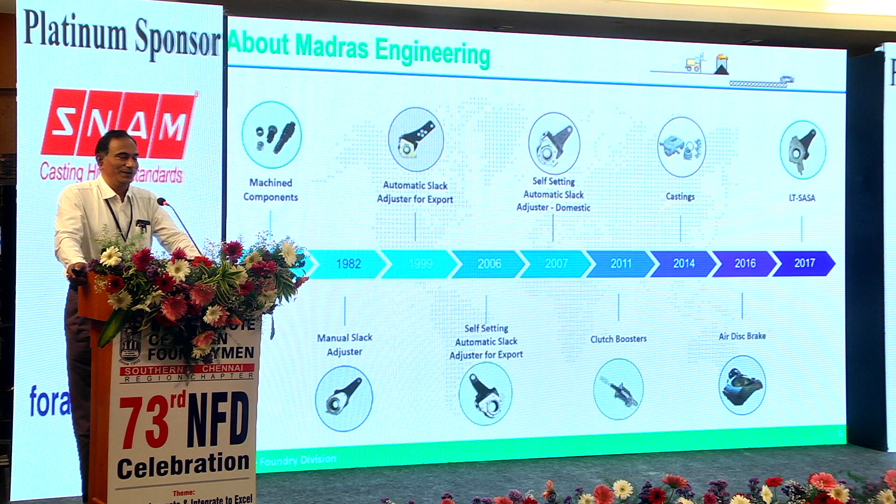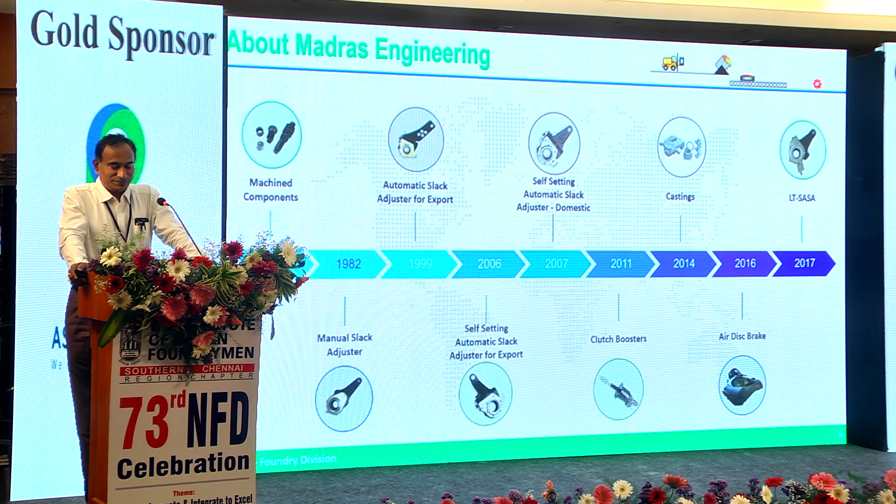About Madras Engineering, we started in the year 1966 with a machining component division. Today we are the world's second largest slack adjuster manufacturer. We always say drive safe, trust the leader. We are the leaders in the business. We are the largest slack adjuster manufacturer in the country, second in the world.

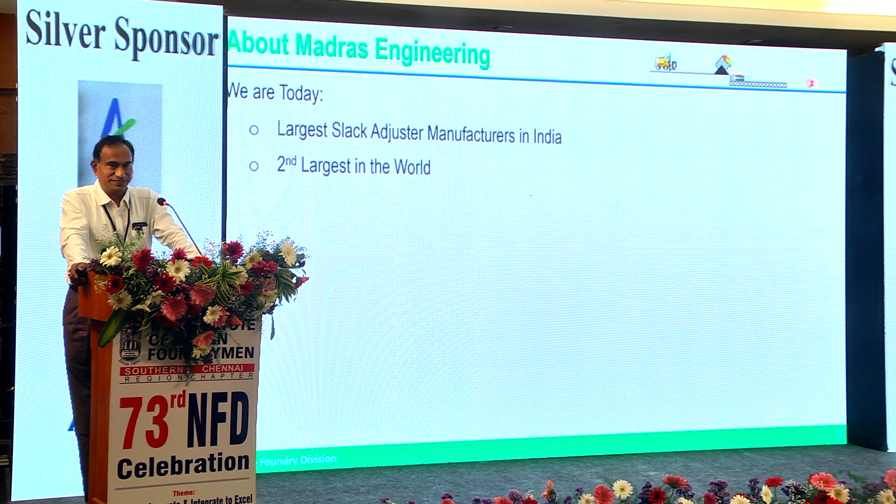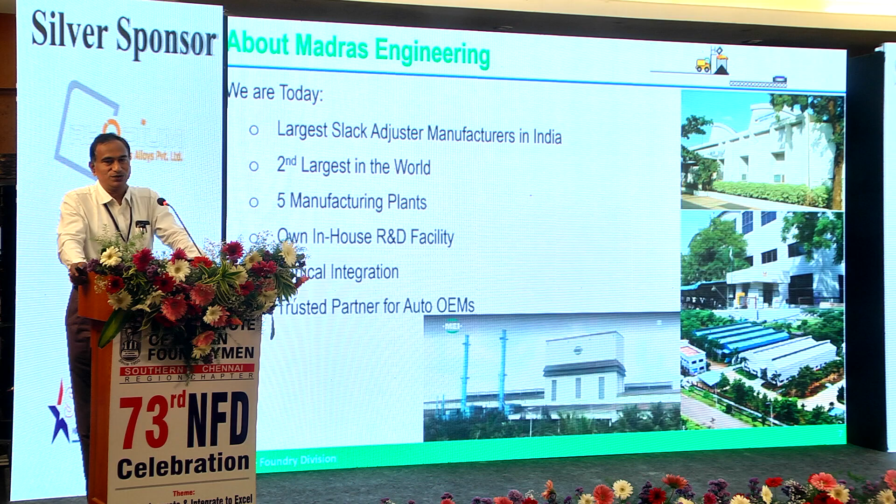We have 5 manufacturing plants, all in and around Chennai. These are our manufacturing plants. And we have our own in-house R&D unit. And we are vertically integrated with the foundry division. And we are the trusted partner for auto OEMs in India and abroad. Global footprint, you can see from here our parts fly all over the world.

Coming to the foundry division, we established commercial production during the year 2013 with an installed capacity of 12,000 metric tons per annum. We added a second molding line to enhance the production capacity to 24,000 tons per annum during 2018. We are now operating at full capacity. Apart from producing in-house, we also buy about 3,600 metric tons per annum from outside foundries.

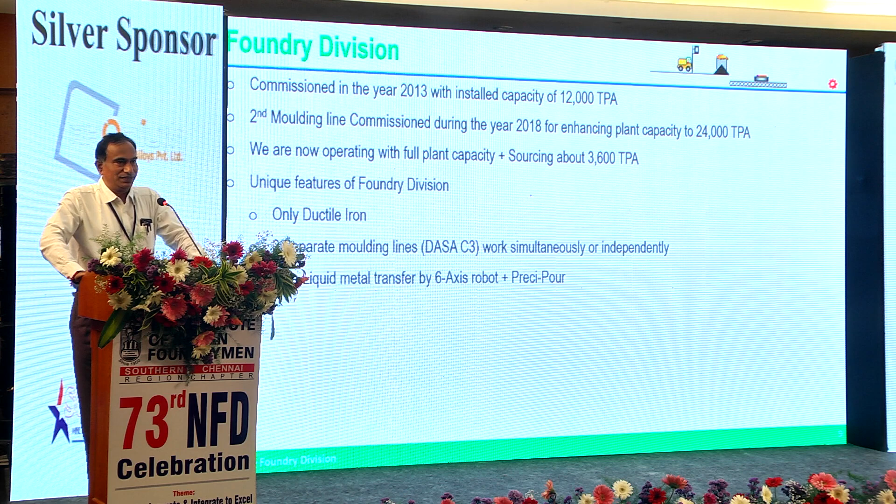We have unique features in our foundry division, like we produce only ductile iron. And we have 2 separate lines, both are C3 lines. They work independently and also simultaneously. That is a unique system we have in our foundry. We have safe liquid metal handling. We have a 6-axis robot that carries metal directly from the furnace till pouring into the tundish. Even the magnesium treatment is done by the robot.

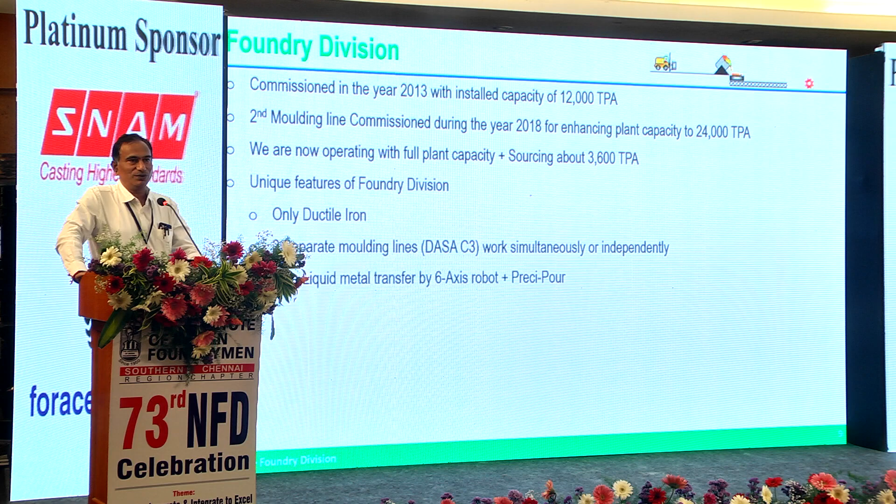And we have Preci-Pour for pouring molds. We have hydraulic trimming to eliminate manual fettling. We have single piece flow. So melt to ship is about 6 hours. That is why our inventory turns are close to 50 times a year. So we produce 1 million parts from 423 various products.

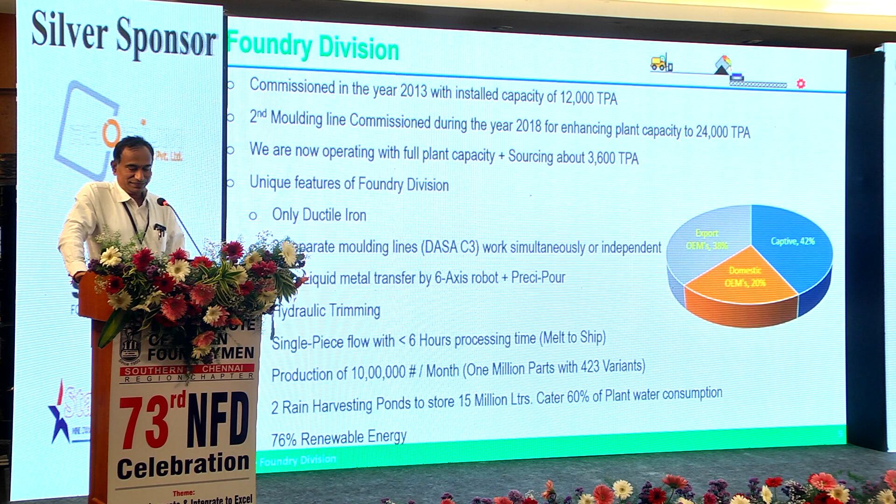And 2 rain harvesting ponds to store 15 million liters of water, which caters to 60% of our plant water consumption. 76% of the power we use is from renewable energy. So this is a brief introduction of the foundry division. Out of the plant capacity, 42% goes for captive consumption, 38% to export OEMs, and 20% is for domestic OEMs.

The objectives of this presentation: as I explained, we are here to share the knowledge, not to teach foundry people. We are all experts assembled here. Whatever we learned over the years, the best practices we practiced in our foundry, we wanted to share with the foundry fraternity. As a foundry fraternity, as a foundry team, we get benefited together.

So we wanted to support the Indian foundry industry to become world class, by design to manufacture, productivity improvement, quality improvement, cost competitiveness, use of technology for efficiency improvement, improved on-time deliveries, customer satisfaction, enhanced collaboration with customers, and product redesign for mutual benefits. So these are the objectives of my presentation today.

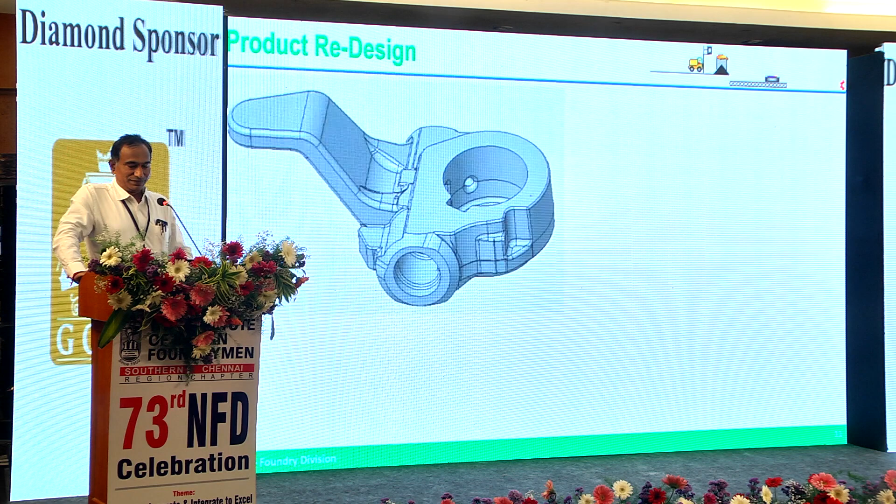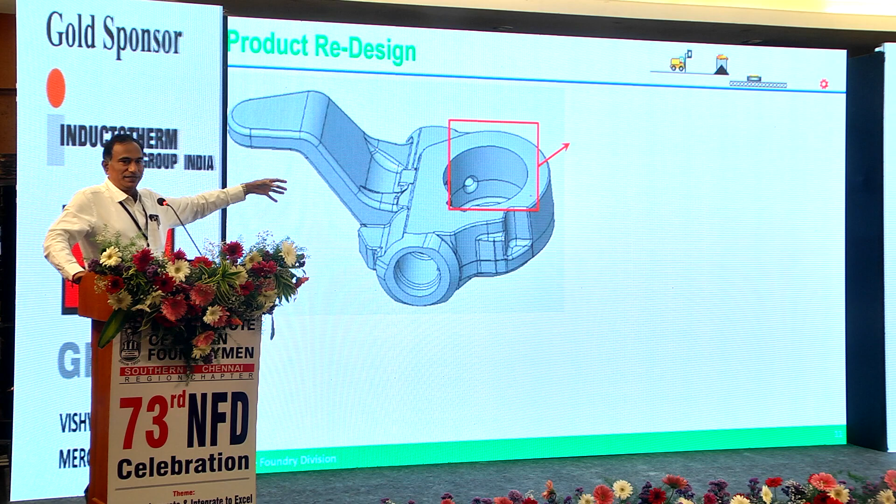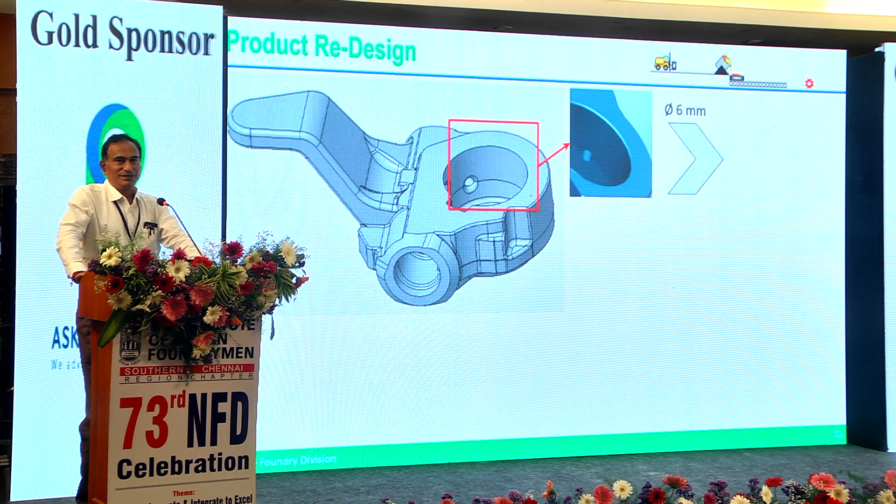So let us go to the main content, the product redesign. We have a couple of examples of how we redesigned the product for mutual benefit with the customers. The hole, called the grease hole, is for pumping grease into the gear assembly inside. If you see the close-up, the hole looks like this. The diameter of the hole is 6 millimeters, and about 10% of the time we used to have hole blockage.

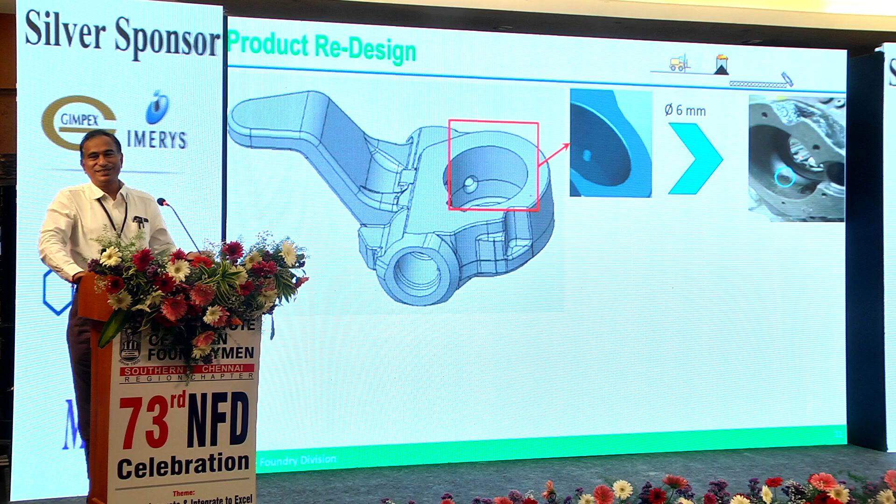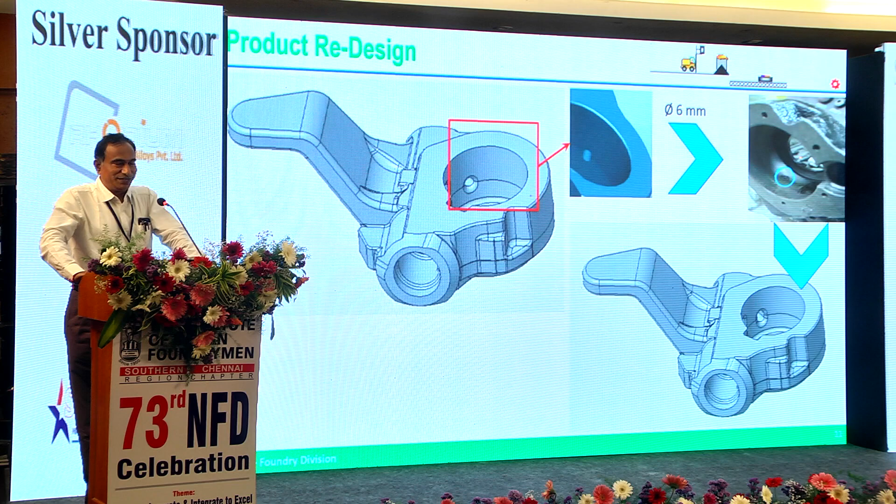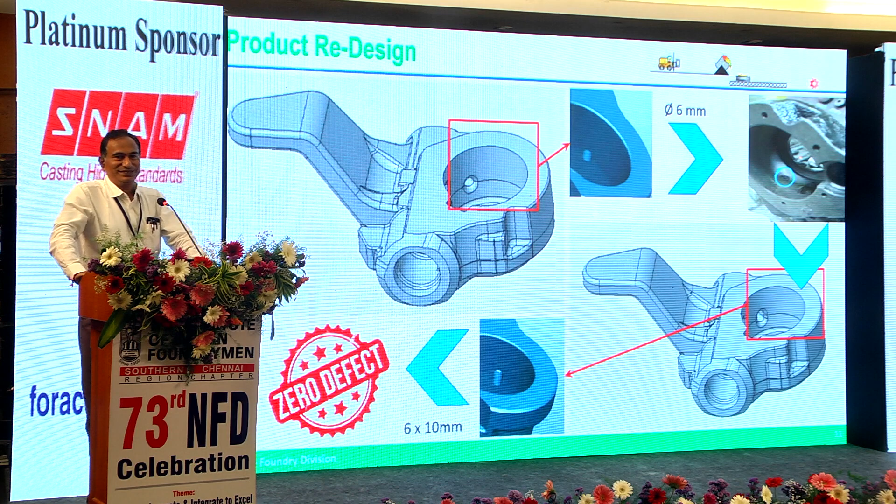The hole is formed by the core, and because it is only 6 millimeters in diameter and about 6 millimeters long, it always tends to fuse. 10% of the time we either had to reject or spend a lot of manpower to remove the core blockages. To overcome this, we redesigned the hole, without compromising fit, form and function, to a size of 6 by 10 millimeters. After implementing this, the defect is 0. Not a single instance of core blockage in the casting since.

Interesting. So this technique used is called why-why analysis. Always we have to question ourselves. We should not question others. We have to question ourselves. Why blockage? Why? If you question ourselves 5 times, the 6th time you will get the answer.

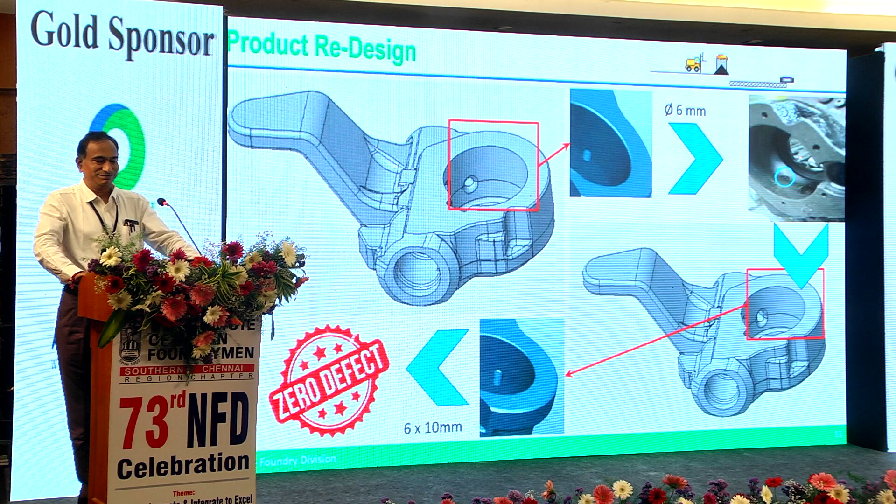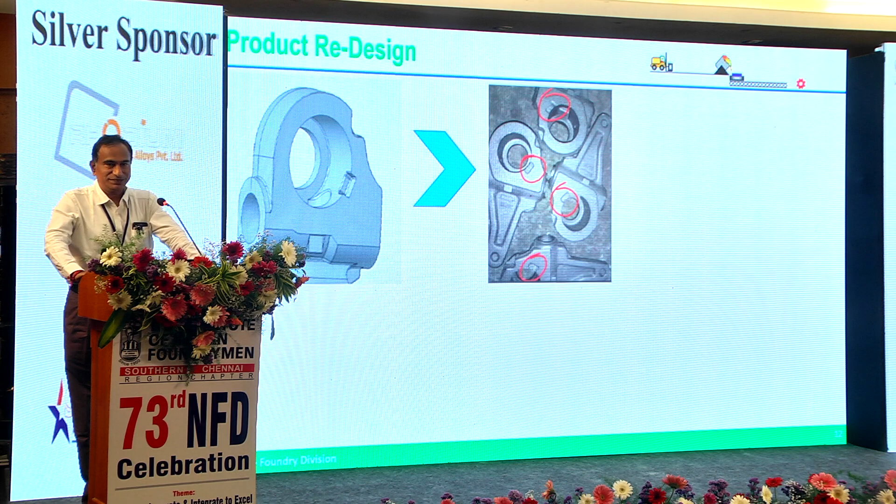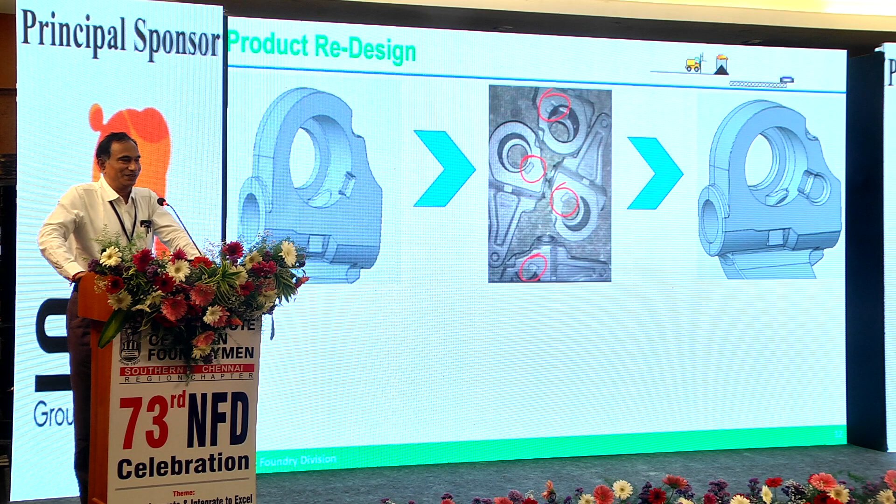Then again we applied why-why analysis. Then we thought, let us enhance the slot size so that the mold never breaks. And there is a reason for enhancing the slot size. Whatever we enhance gets scooped off in the machining. So finally there is no impact on the machined casting. Whereby we are able to eliminate the mold breakage to 0. After implementing this, there is no evidence of mold breakage in the Sasa body castings. So this is also again the technique called why-why analysis.

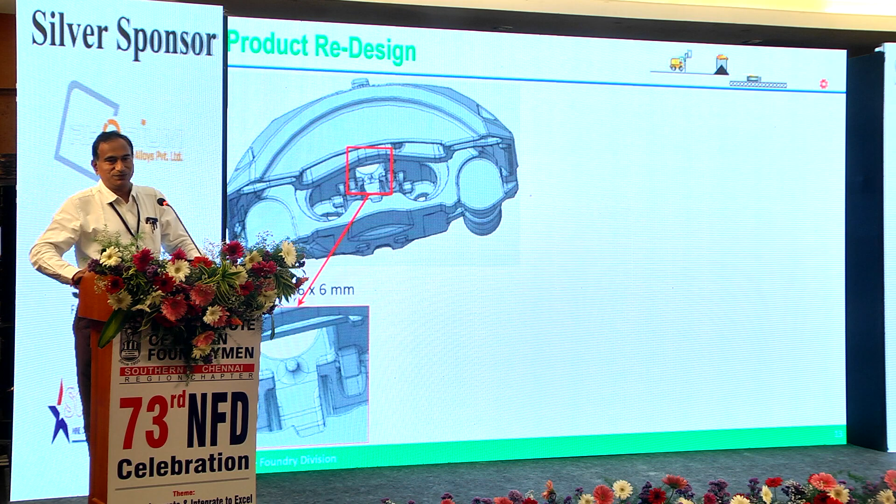Then the third one is also on the product redesign. This is an ADB, air disc brake housing. We have a sensor pad lock which is about 6 millimeter in diameter and 6 millimeter length. It is a very small projection in a large body of 20 kilograms weight, and this is formed by the core. So when the core is painted, the small slot gets filled up with the core paint. So one day suddenly about 200 bodies got rejected because the core paint got settled in this, and the people in the molding did not notice.

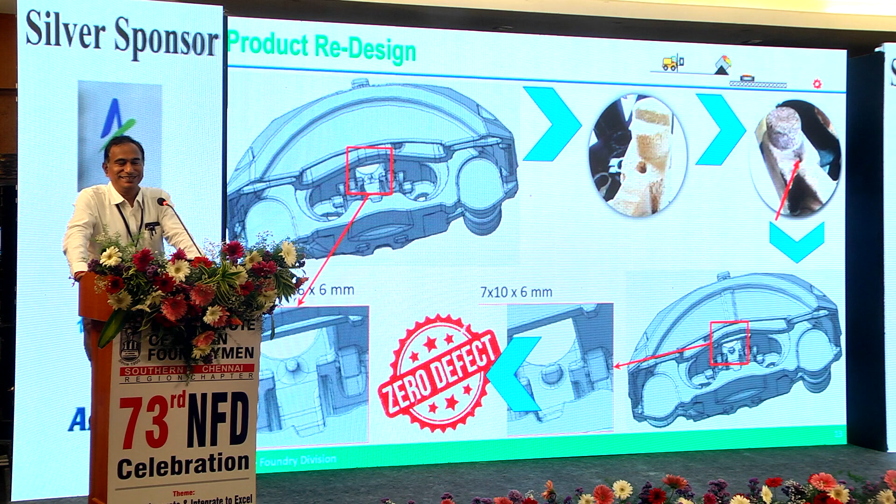So that triggered us to think again why. So we found a solution for this as well. We worked with the R&D and got the product redesigned to the size of 7 by 10 millimeter, keeping the height 6 millimeter, which led to 0 defect. After modifying the design, not even a single instance we had a mold breakage or a profile issue in the casting. So again we achieved 0 defect by applying why-why analysis.

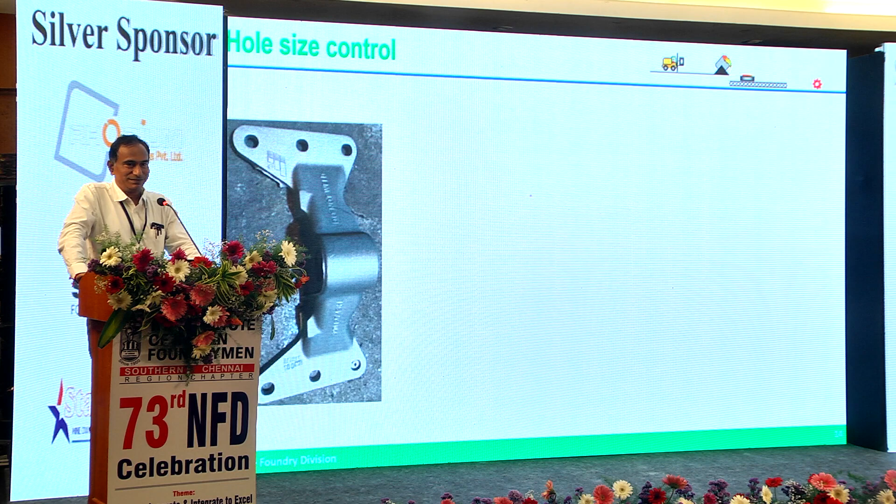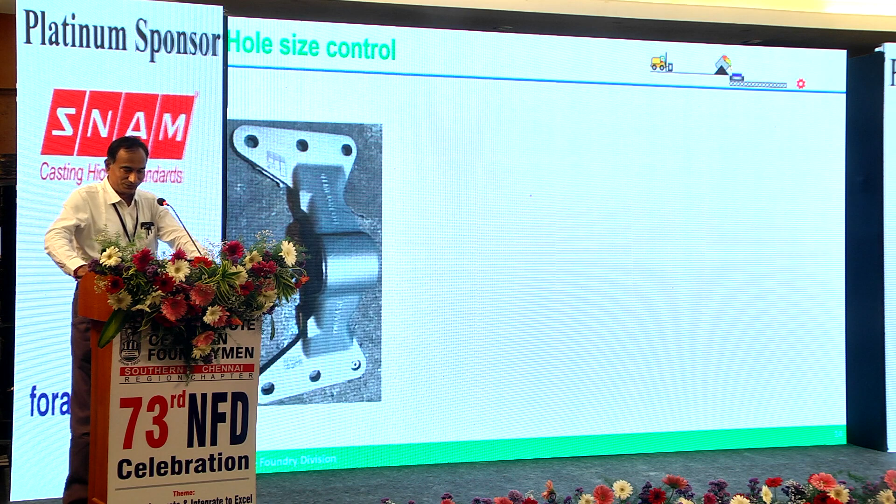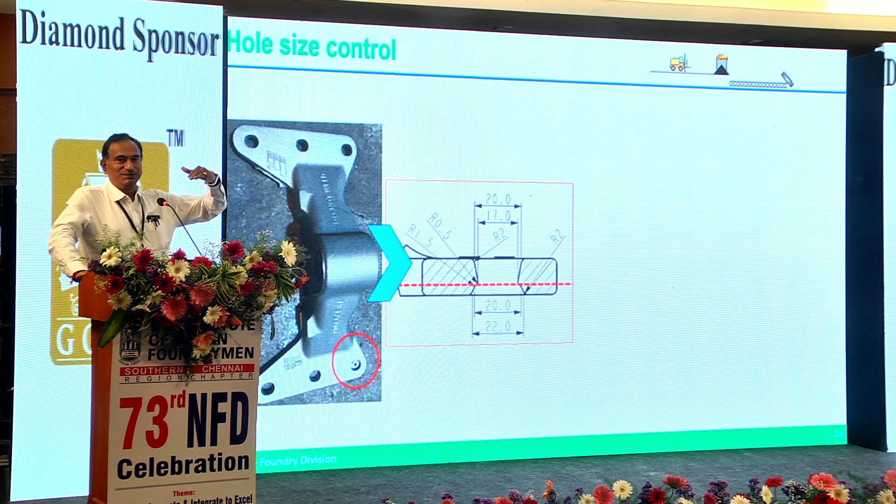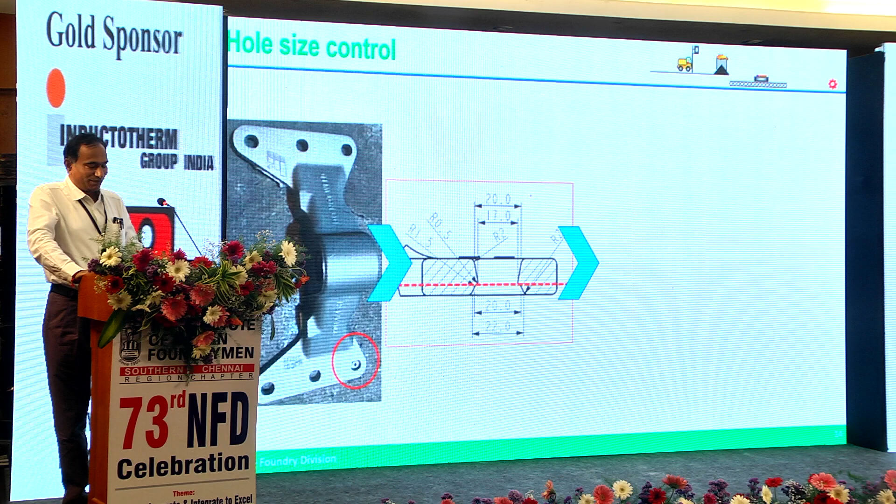Keep moving. So this is a 5th wheel mounting bracket, mainly on large trucks in Europe. There are 6 holes. These are formed by the cores. I think you cannot see this. About 50% of the slot is formed by the core, and another 50% is formed by the mold. Obviously there will be a gap between mold and the core. There will be a flash. While puncturing the flash, we encountered the slot oversize. The no-go gauge was entering, whereby we had some rejections. We had customer complaints as well.

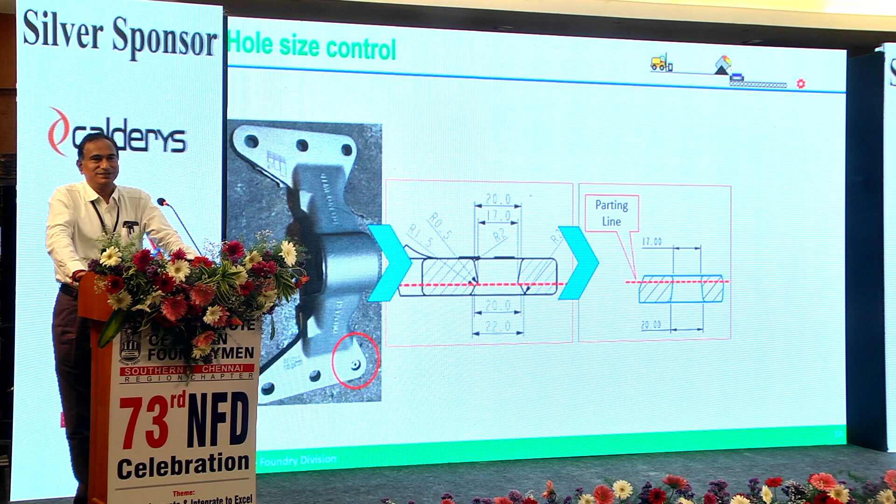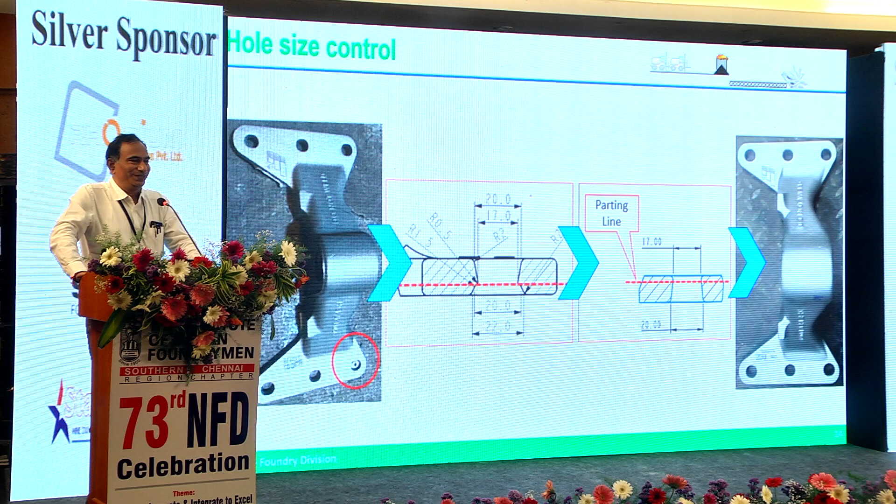Then again, the why-why technique is applied. We redesigned the slot by shifting the parting line to one side without compromising the fillet on the top, as shown in the picture here. By doing this, we achieved no flash, no no-go gauge entering. We fixed this problem by redesigning, just shifting the parting line. Again, the technique applied here is why-why analysis.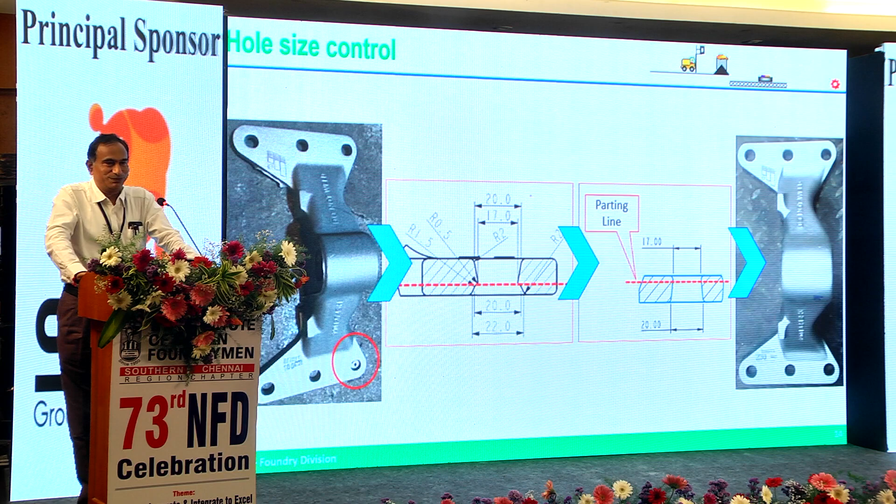So hope you're all enjoying.

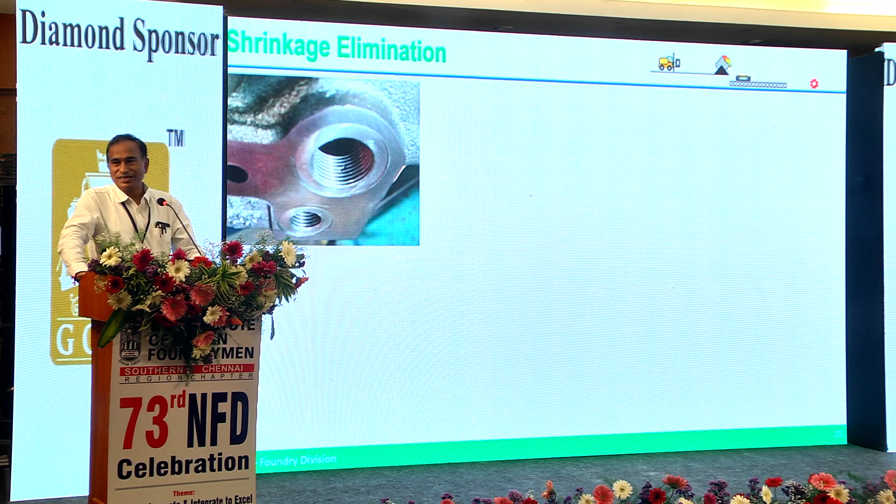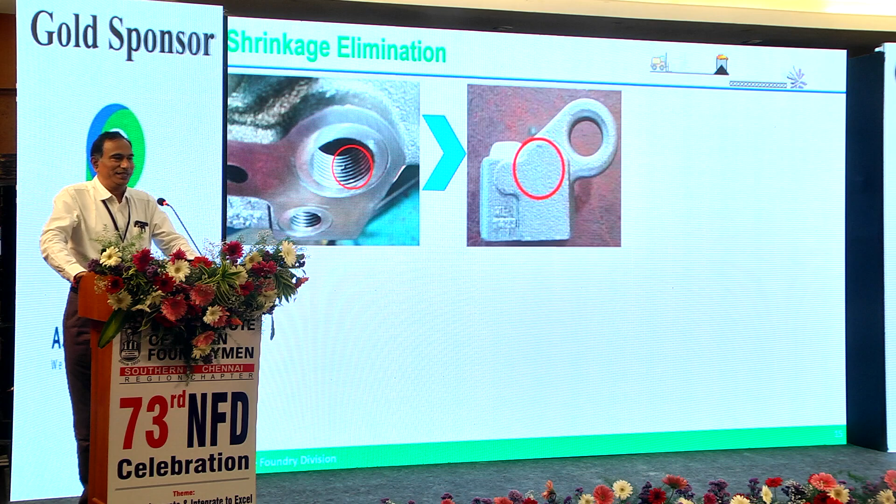So the next one is on quality improvement, a shrinkage elimination. The part is called connection housing. It goes to Daimler. There is an M20 hole. Always about 25% of the parts were getting rejected because of shrinkage in the threaded hole. Again, why? Because we are not designing the product; the customer designed the product. They designed it like a solid hole. They do pilot drilling and then thread milling. So we had no choice but to produce the part like this.

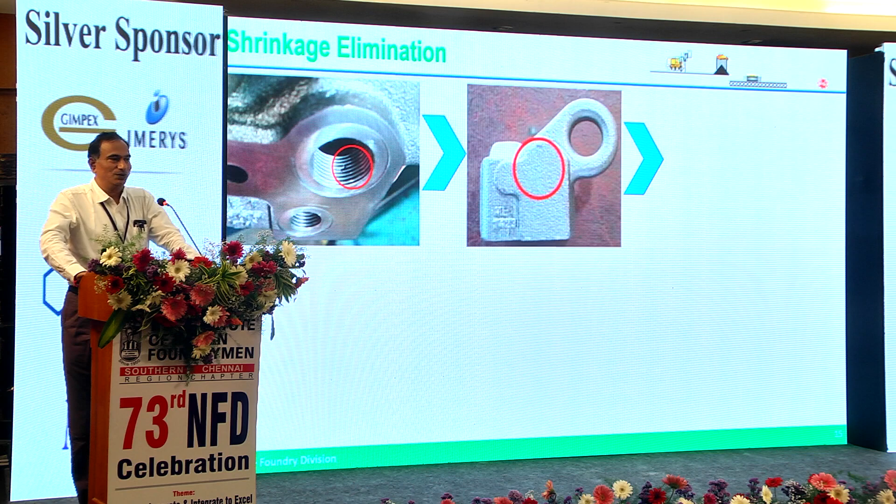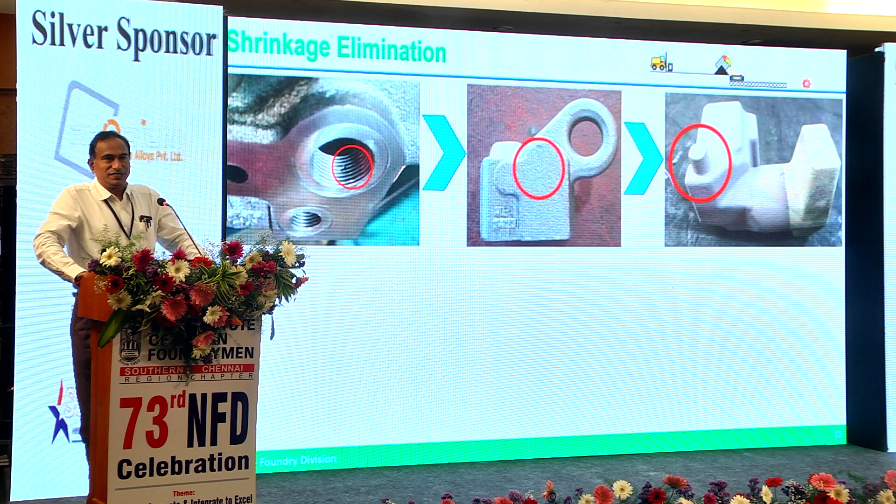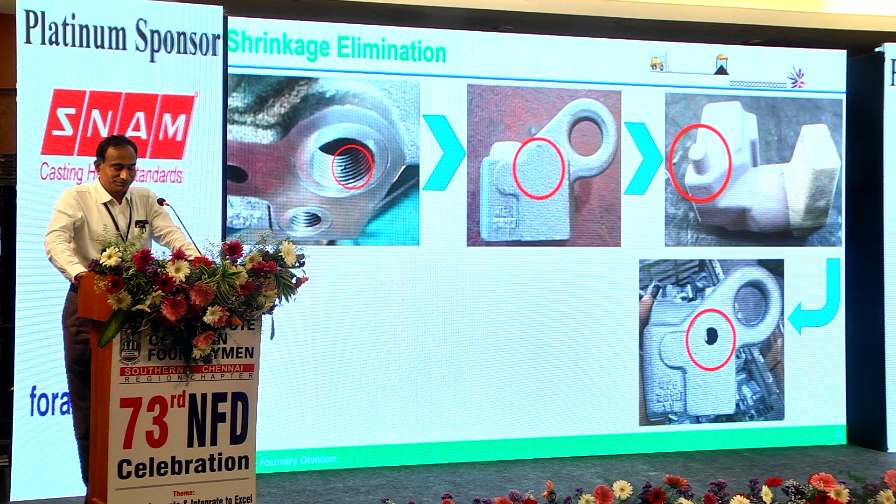Then again, we worked with the customer saying that if it is an M20 threaded hole, the pilot drill will be about 17.5, then the main drill will be 18 mm. Why can't we introduce a core so that the modulus at that particular location can be brought down significantly? The customer agreed. We modified the core box, one cavity. We poured the castings with this, got it machined: no shrinkage, zero defect. It has gone from 25% to 0% rejection.

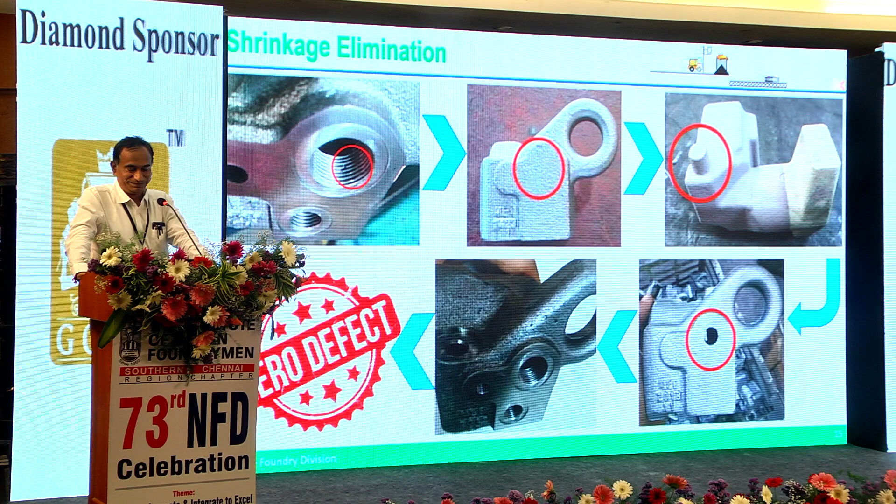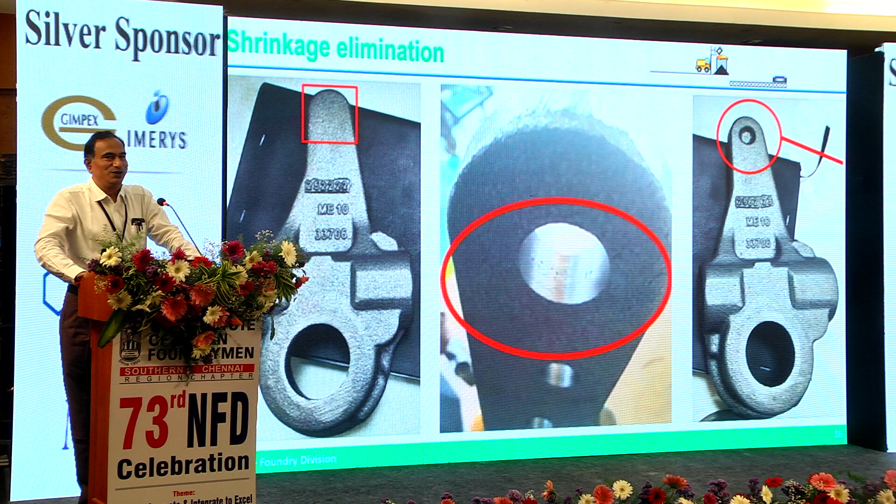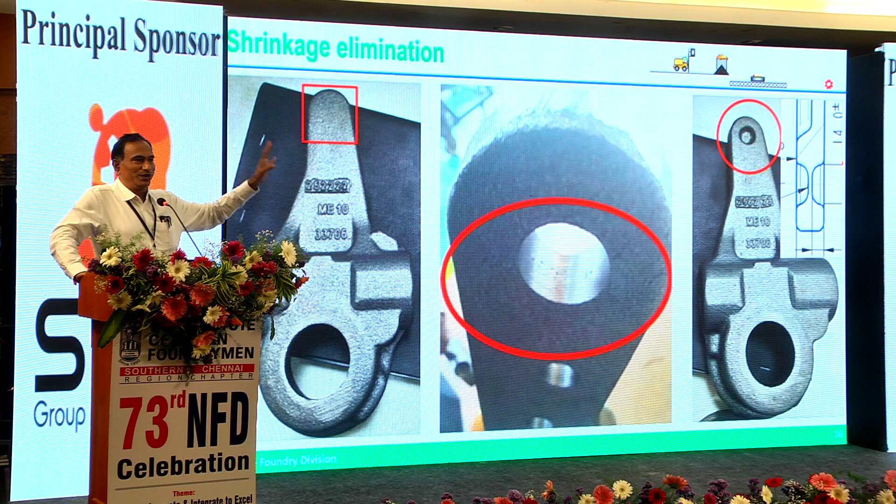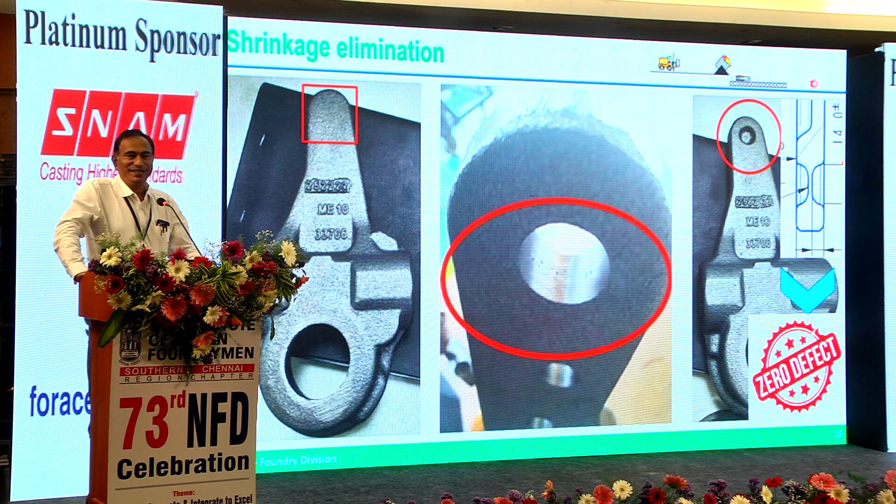Then again we applied why-why analysis. We found that the stress concentration and the modulus at the particular location is very high. So we had no choice but to reduce the modulus. We introduced a dimple, a profile on both sides of the castings, so that the modulus at the particular location is brought down to the lowest levels. When you drill it, then zero defect. Not even a single casting got rejected after introduction of the dimple in the tail hole. So another quality improvement initiative by Madras Engineering.

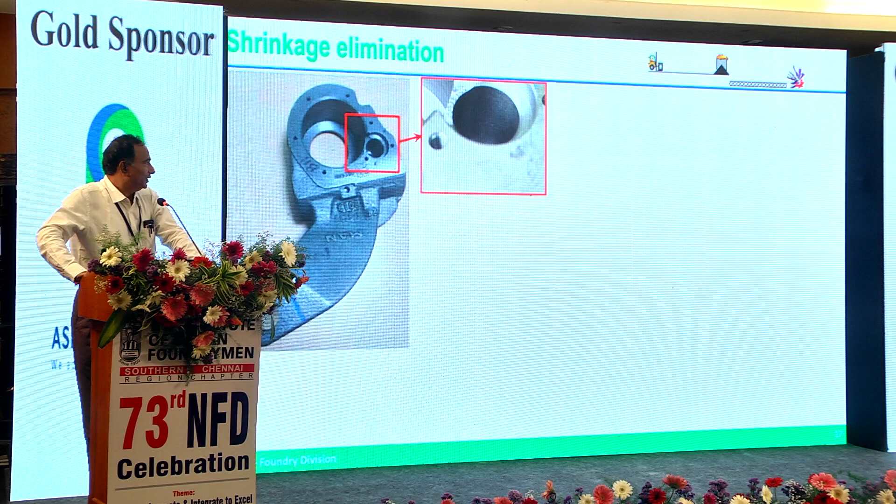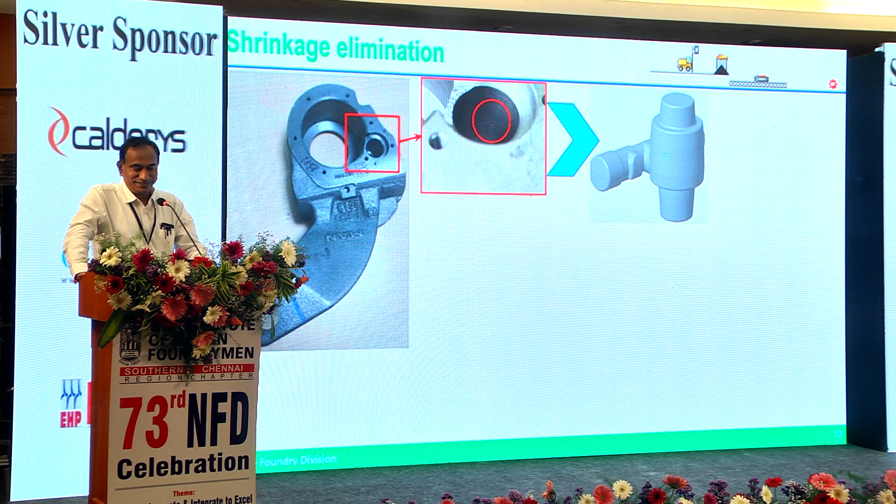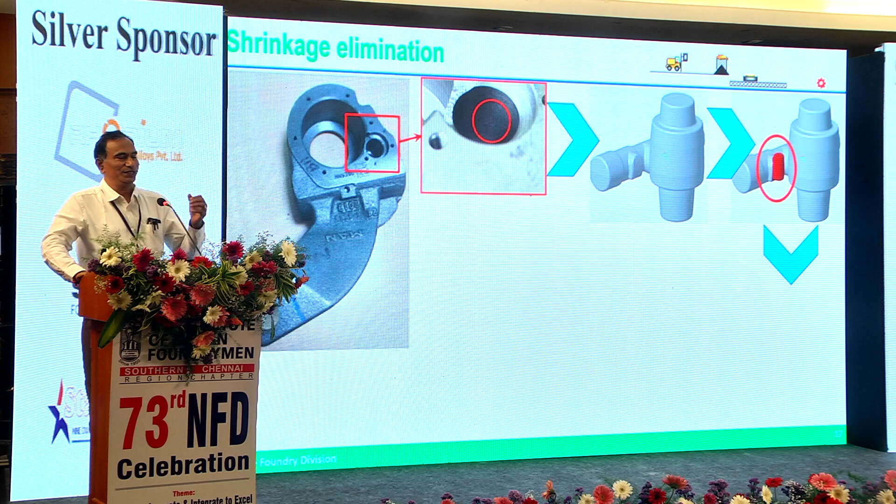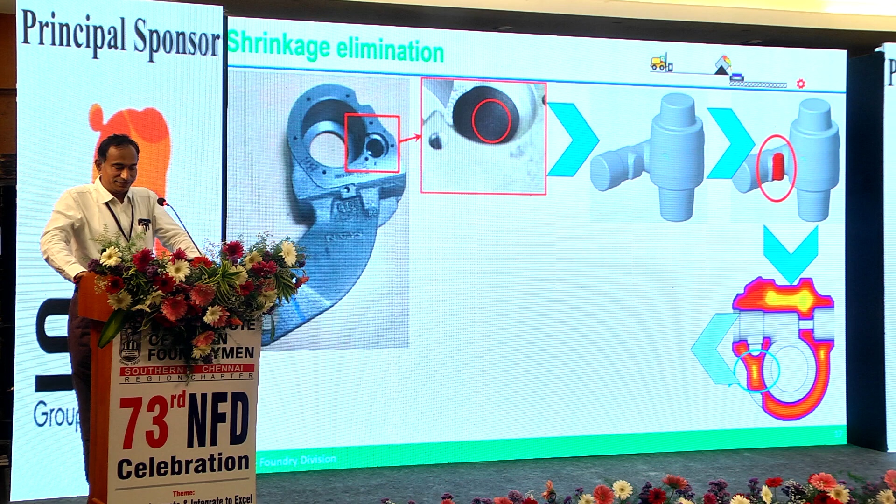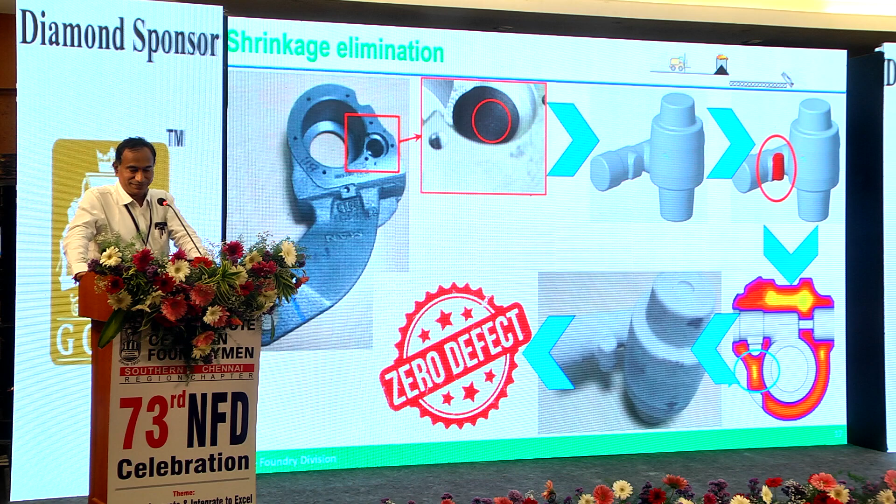So we increased a core profile towards the pinion bore to reduce the modulus at a particular location so that the shrinkage gets pushed outside of the defect location. We got it simulated and found that the simulation results are effective. We have implemented it on the part, and the core box is corrected to have the additional profile. We achieved zero defect on this product as well. Again, the technique applied is why-why analysis.

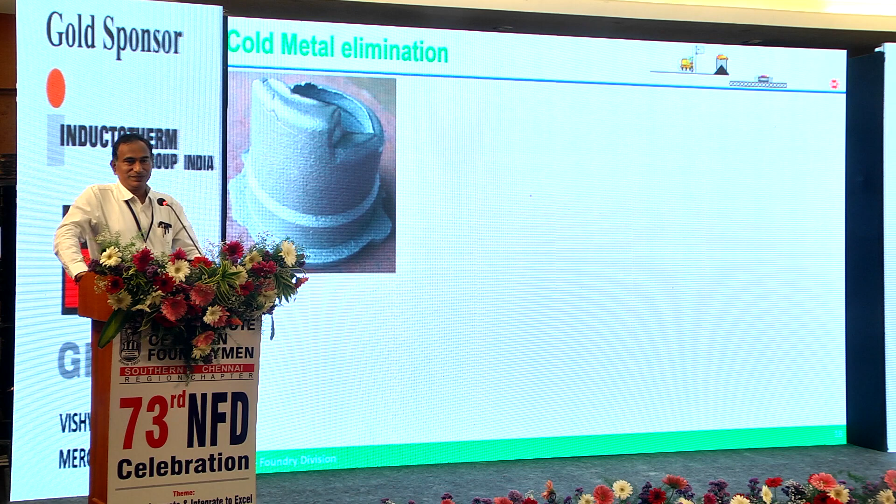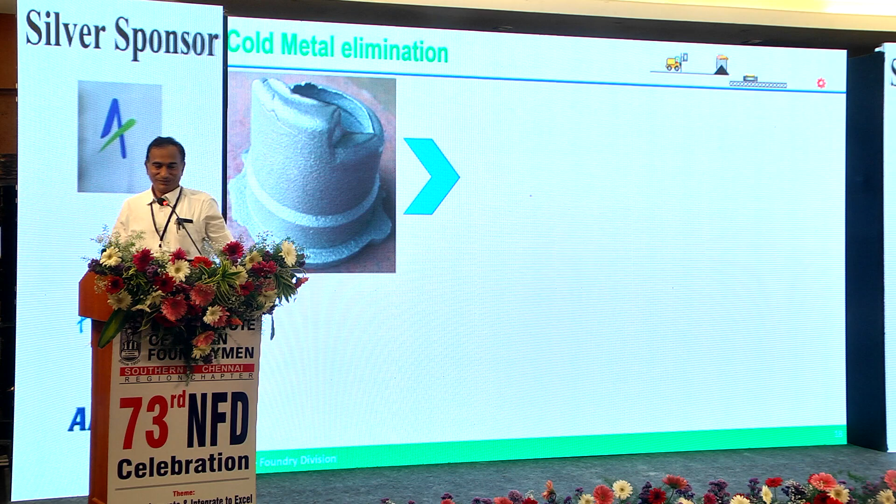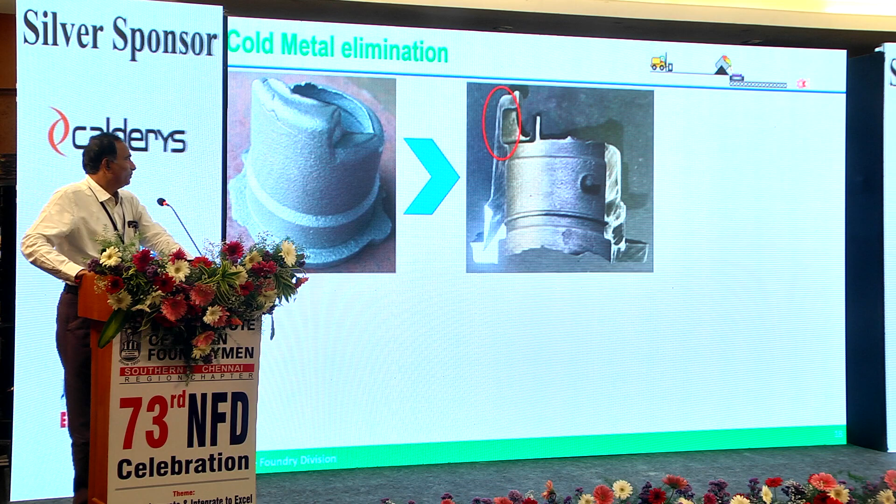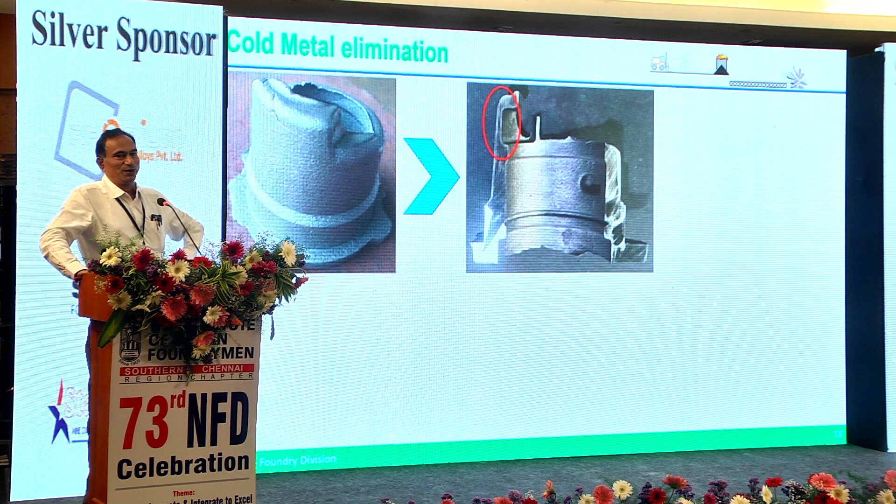Next one is on quality improvement as well. It is a case through shaft. About 10% of the parts used to get rejected because of cold metal. At the top, we can probably see this, with the cold metal in the casting. On careful examination, we found that there is a bottleneck. The wall thickness was found to be within specification, but on the lower side of the specification. So we found that is the root cause, a bottleneck which is preventing the hot metal reaching the topmost point where there is more wall thickness.

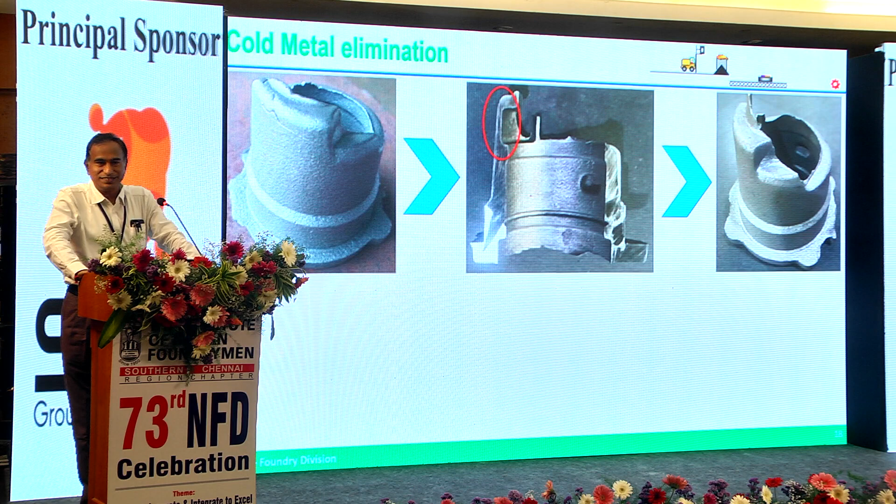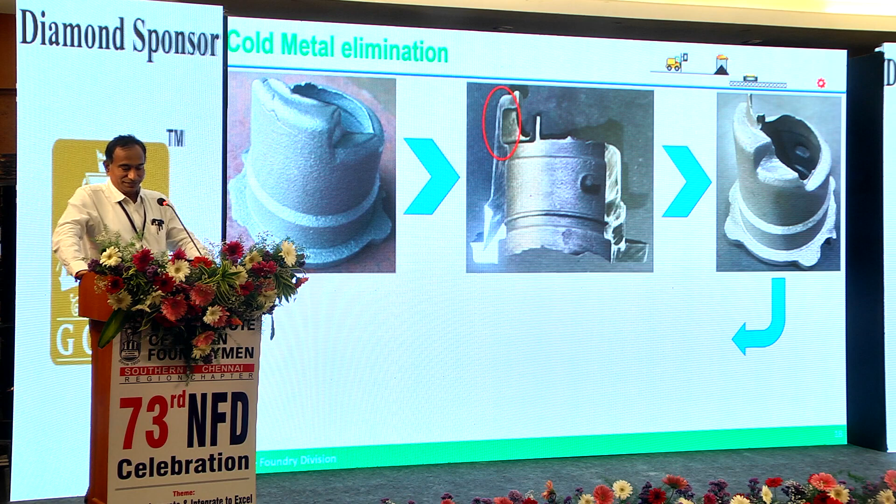Again, we corrected the tool to have wall thickness on the higher side of the tolerance. We did not change any specification. We exactly followed the customer specification. From the lower side of the specification, we moved this to the higher side of the specification. That's the only difference we made. So this is the change. Cold metal becomes zero.

One more example on sand drop elimination. We deliberately made it dull because there are a lot of intellectual properties involved in this. The filter location, normally in the DISA vertical molding system, is always on the top. That was leading to heavy sand inclusions. So again, we applied why-why analysis on the sand inclusion, where the inclusions are coming from. It was not that easy, almost a week we spent along with the team. Is the inclusion coming from the metal, or are inclusions generated within the mold?

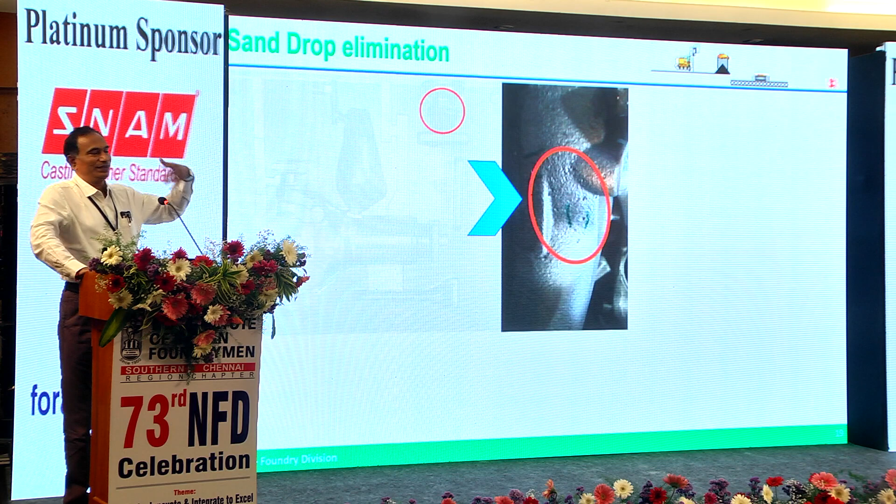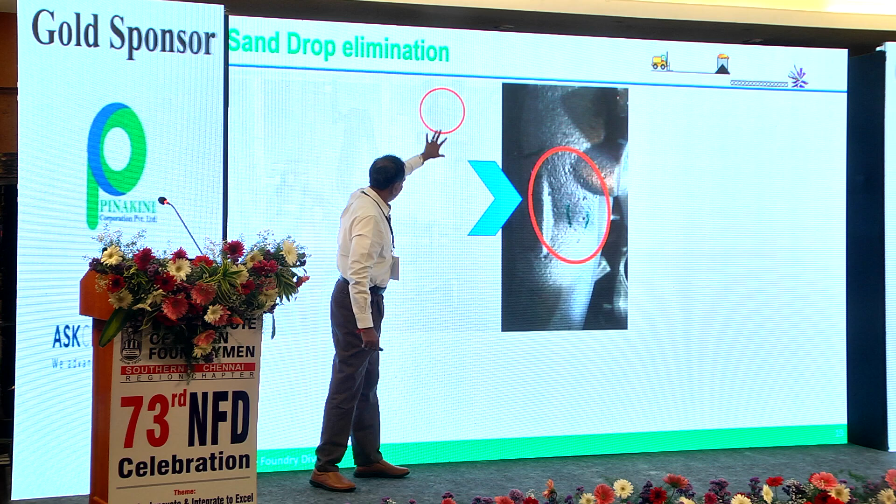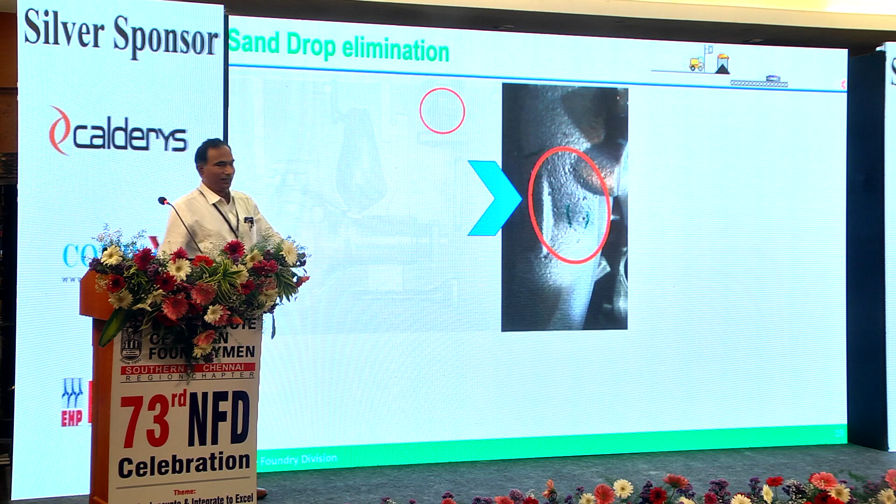We made diagrams on the board, we did simulation, and later we found that when you pour hot metal here, there is a filter. So the incoming variance is almost eliminated because we have the filter. There are no inclusions coming through the metal; all the inclusions are generated within the mold. We also identified that the gap from here to here is about 300 millimeters. When metal is poured, it falls directly to the bottom, then takes a turn, and there is a choke here. From the choke it passes into the casting cavity. So the turbulence created within the mold is leading to the sand drop.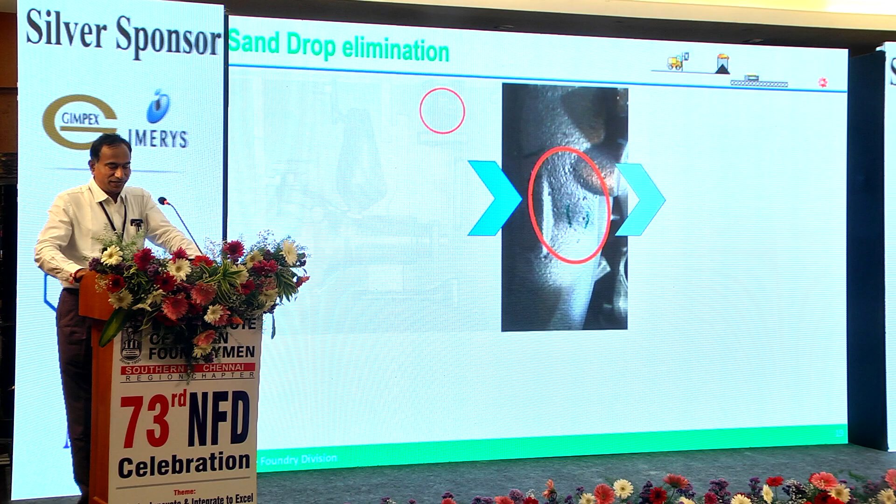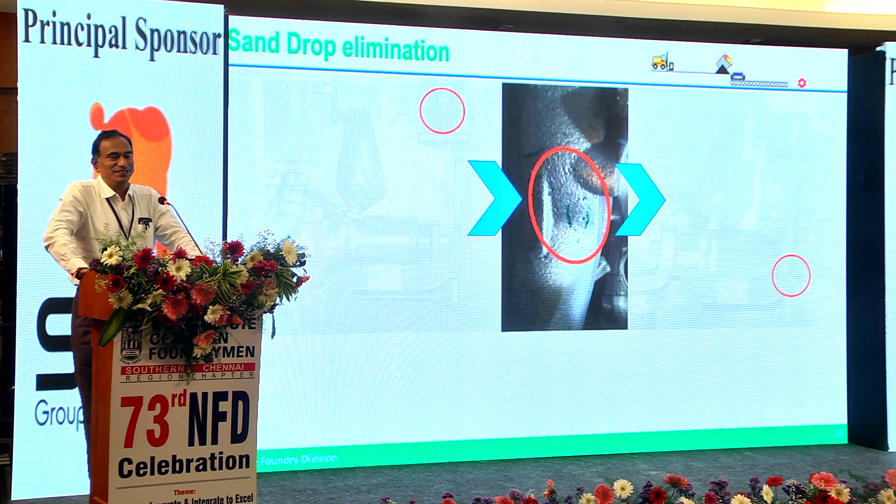Then we modified the filter location. We just moved the filter location from top to bottom. Earlier, before doing this, about 12 plus 8, 20% of the parts used to get rejected. After introducing this, the foundry rejection is less than 0.5%. The machining rejection has come down to less than 2%, straight from 20% to 2.5%.

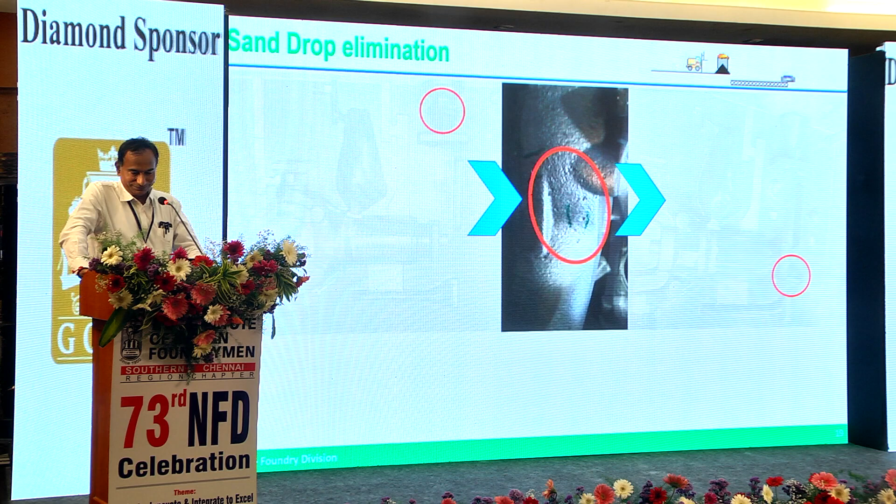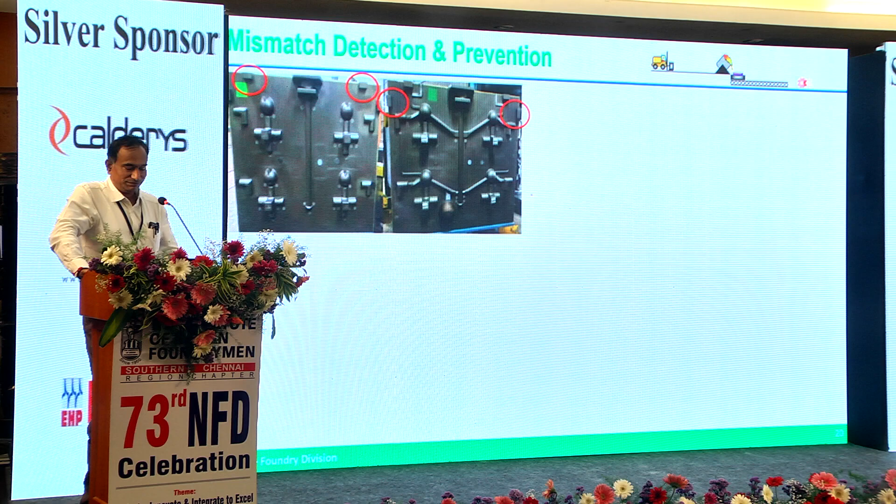This is interesting. This is a mismatch detection and prevention. This project got the Kaizen Award on 4th of this month. So this is a unique technique which is used at MEI Foundry. We know these are the two halves of the patterns. This is a mismatch pattern, SP and PP halves. We just provided a small projection on the pattern that will create a pocket which is exposed outside.

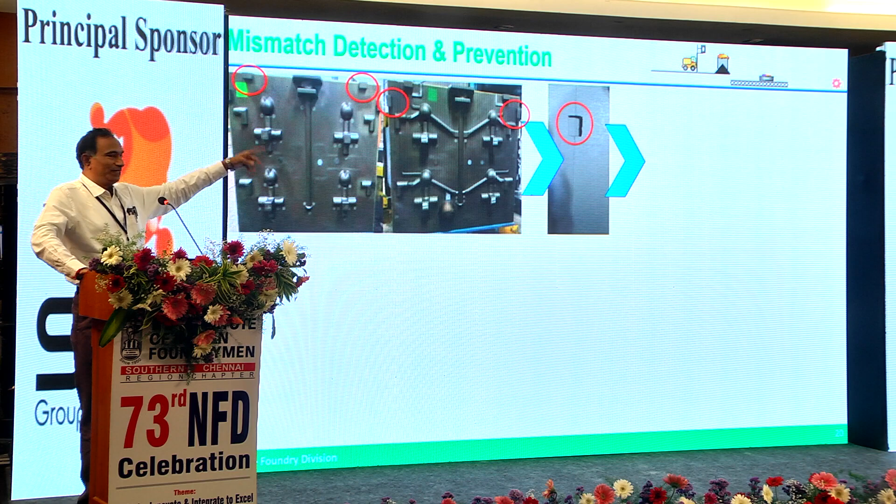The projection in the pattern is creating a void or a pocket on the mold which can be seen from outside. So if any mismatch is inside, that reflects the mismatch that can be seen with the naked eye from the outside. So the middle one is from the side, the last picture is from the top, center one is a down sprue, and these two are the mismatch detection pockets.

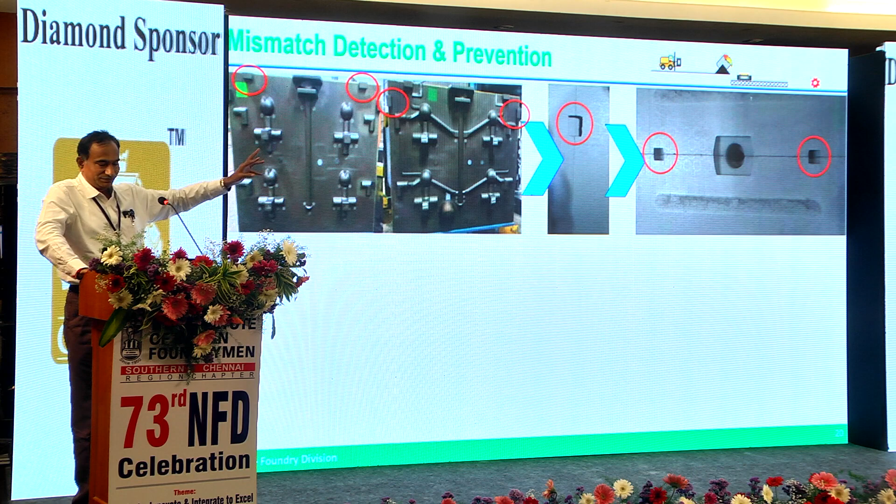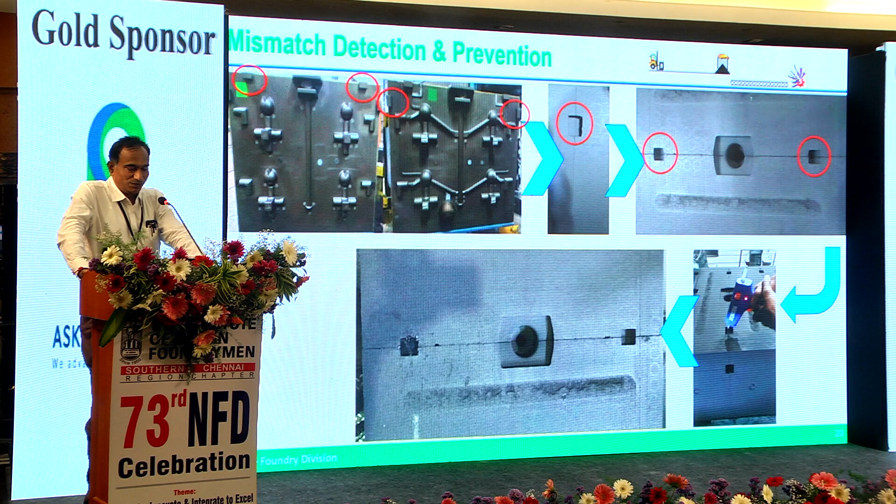So once the mold is made, we take a glue gun, fill the cavity with the glue. This is a filled mold. We take out a glue sample and check the mismatch. Even without checking the glue, with the naked eye, we are able to detect the mismatch inside the mold versus what is seen outside.

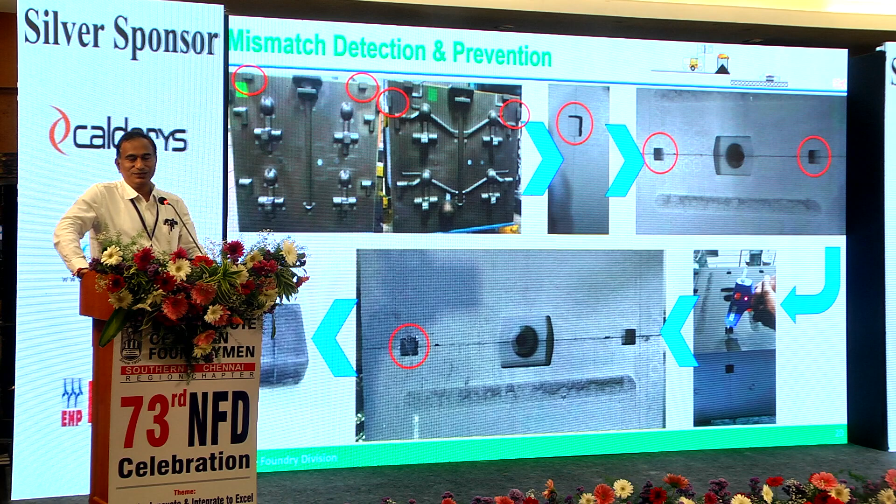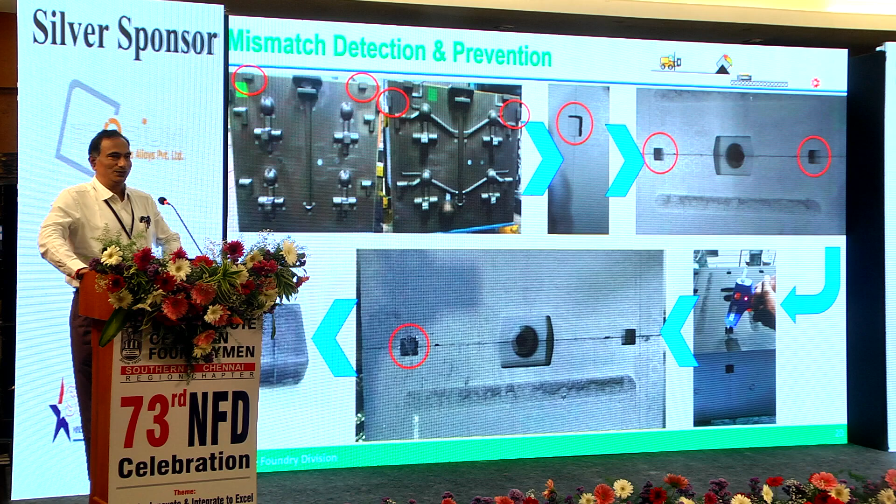Otherwise, earlier practice was to pour molds, mismatch molds. It takes 2 hours to come out, then blast it, go to quality room, inspect. It takes about 3 to 4 hours. Within 3-4 hours, we would have poured tons of castings. We used to have heavy mismatch and lot of issues. Everything is prevented now, it has almost come to zero today.

Next one, hopefully the last one, is productivity improvement. So there is a match plate. Again, it is hidden. There are 7 rings mounted on one match plate, because the other match plate has to be blank, because we cannot produce on both match plates. So how do we improve the productivity to 2x? That was the thought process. Then again, we went through the brainstorming session.

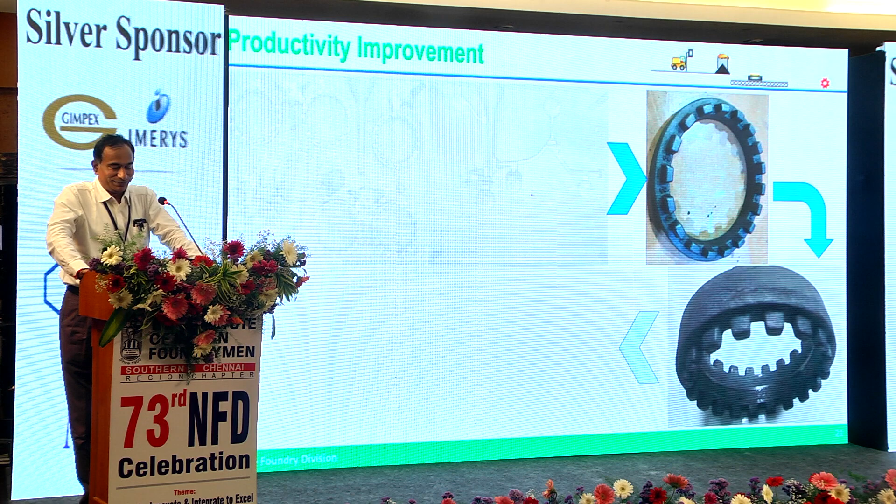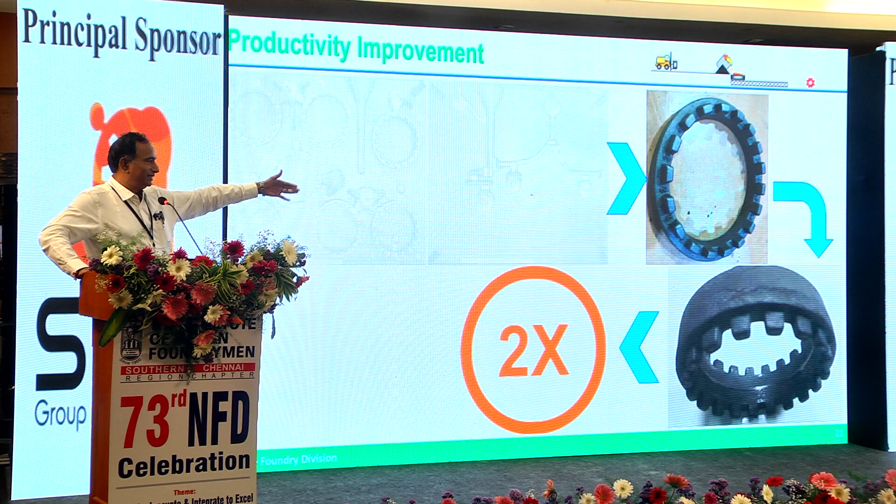This is the ring produced out of this. We used to get 7 rings for every shot. We modified the pattern to make double, back to back. So productivity became double. Now the only challenge is how do we slice it to become 2 parts. We are working on slicing on a lathe, so 1 becomes 2. So the productivity is doubled. 7 cavities per match plate became 14 per match plate.

Last one, shipment handling is very interesting. As I explained, we produce 1 million products from 243 various line items, shipping about 25 to 30,000 pieces from the foundry within 6 hours of pouring is a big challenge. So this is how we used to ship earlier. Then we converted them into dedicated designed bins. You can see there are 10 columns, each will have 80 parts. We are certain that exact quantity will go, exact product will go.

About 100 varieties of Sasa bodies look similar. So this is designed such a way that no wrong part goes into this, and no excess or less parts go into this. And also we introduced a QR coding system. Once we scan it from quality, it goes and sits in finished goods. If you scan again, it goes to the ERP, the invoice gets automatically printed. Just go to the printer, take the invoice and then ship. You don't have to recount and pack. So to that extent, we made automation.

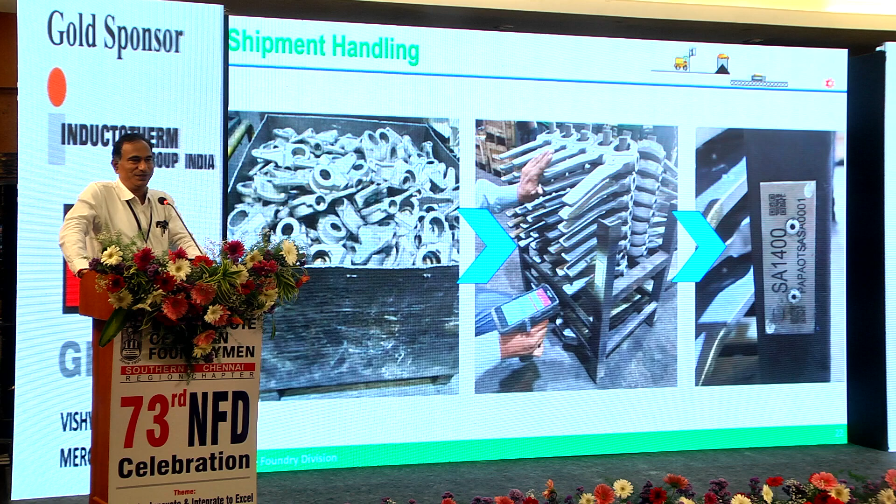So disclaimer, we all know that every foundry is unique. The techniques or ideas shown here are implemented in MEI foundry. Doesn't mean that they work in other foundries, because every foundry is unique. The material of construction we use here may be different from your foundry. The molding line may be different from your foundries. The sand system could be different. Gating design is unique to the foundries, and plant layout is different with respect to the cooling time, and support from customers.

Because most of our products are our own products, we have access to go to R&D, engineering, sit across the table, find fit, form and function. We can argue with them and get modification. Drawings are modified very easily. It's not going to be that easy when you are talking to external customers. That is one challenge you have. However, we got it done with Daimler in one case.

So with this, I have a small video before I close. So let us be like Black Donkey. Thank you, sir. Any questions, I will be happy to answer.